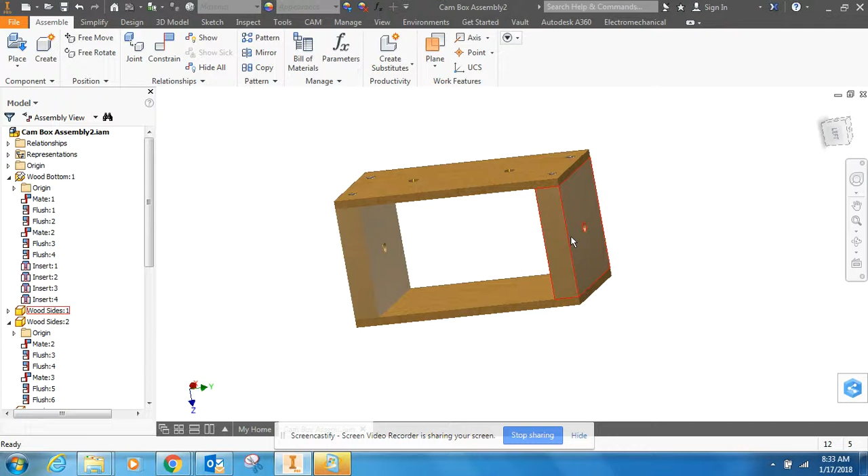This is a video on how to add the cams, the handles, and the followers to our cam box. As you can see, this box is fully assembled. It's got a top and a bottom, the sides, the holes in there, and the screws that we downloaded from Content Center and installed.

Now we're going to put all the other pieces together so we can make it animated and make it move. So let's put the dowel that goes through these two holes in our sides.

So we're going to go to place. We want the one called crank dowel. I'm going to open it up, place it in there, then hit escape. Otherwise, it just keeps adding more of them in there.

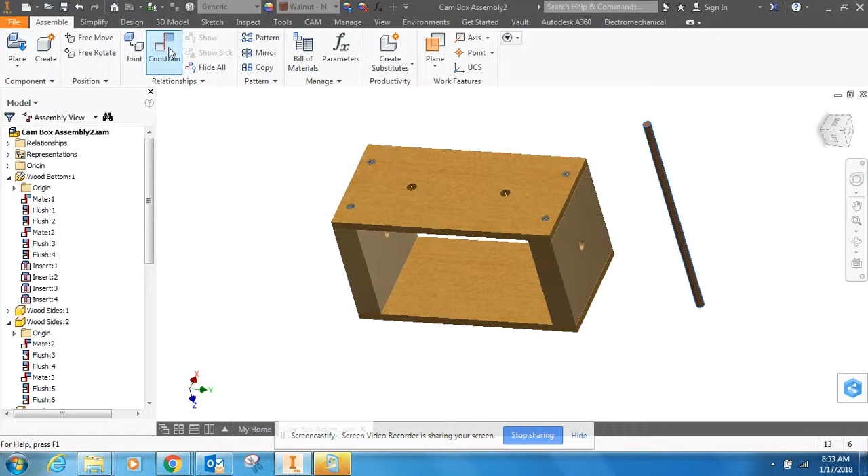Now I have to get this dowel to go in this hole. So I'm going to go to constrain and use my insert constraint. Remember, with the insert constraint, all we're doing is matching up circles. So we'll click on the circle for the hole, the circle for the end of the rod. You see it didn't go in there like I wanted it to.

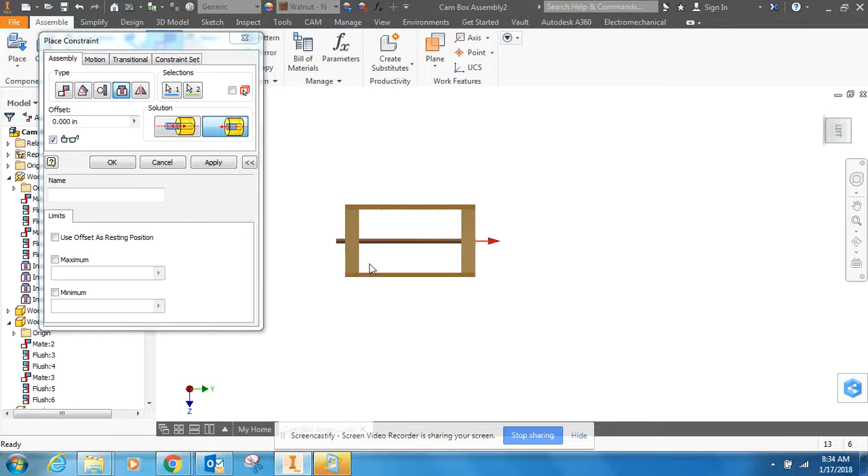That's no big deal. There's a little button here that says align. You can just flip it from one side to the other. Now, if you look at it straight on, you notice how the dowel sticks out on one side and not the other. What I want is the dowel to stick out on both sides.

So I do that with offset. If I type in 0.25, it moved it that way. If it didn't work, then you just change this to negative 0.25. So it's one of those two, either 0.25 or negative. I'm going to apply that constraint.

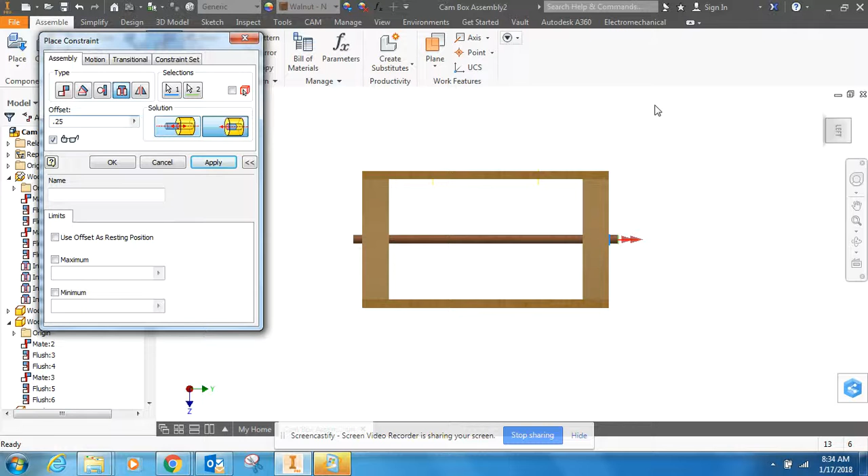Now I want to put the handle on. So I'm going to go to place. There's my handle, crank handle. I'm going to open it up, and again, I just need one of them. So I'm going to put one of them in there, hit escape.

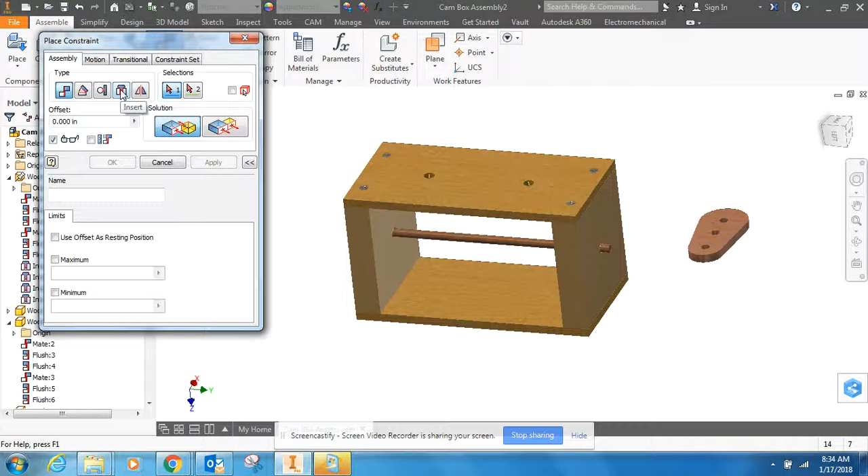Use my constraint, the insert constraint. I'm going to click on this circle and match it up with that circle. I'm going to look at it a little bit closer, and it didn't do what I wanted it to do. So it should be flush on the outside. Again, I'm going to click this align button, and you see where it kind of flushes it out there. I'm going to apply that one.

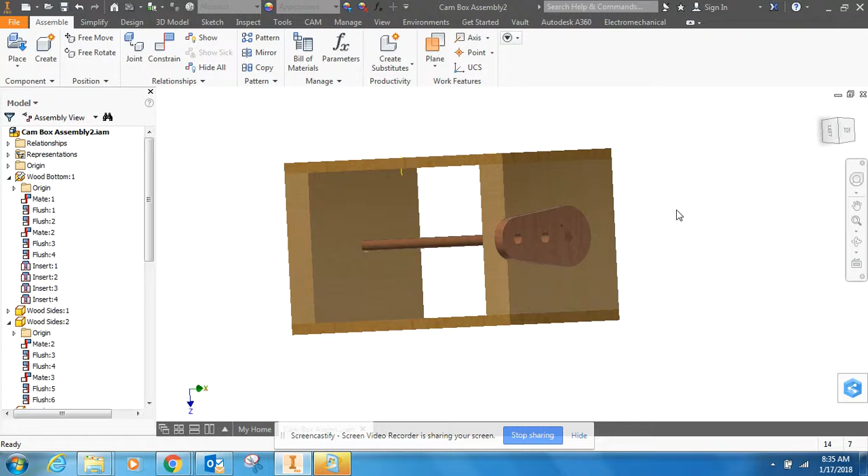Now there's a dowel that goes inside the handle to make it easier to turn. So I'm going to go place. This one says crank handle dowel. I'm going to open it up, place it in my assembly, and hit escape.

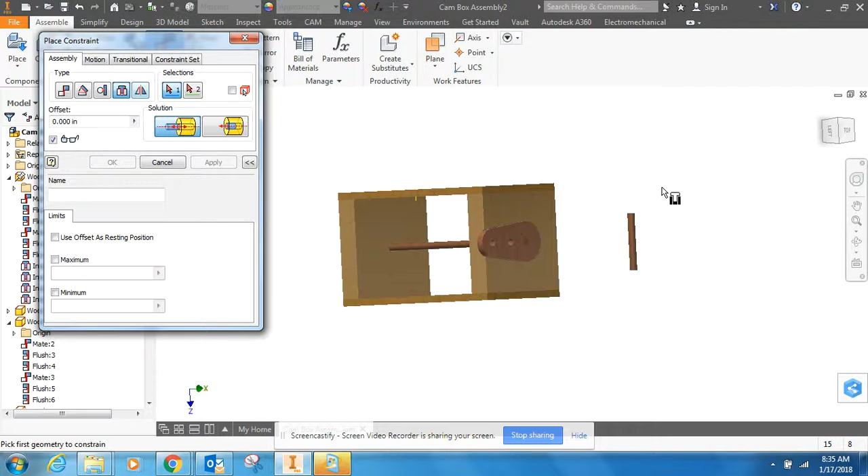I'm going to insert this into that hole. So I'm going to constrain, insert. Again, all I'm doing is matching up circles. So I'm going to match that circle up, not to this outside circle, but to the inside circle, so the bottom of the hole there. So I'll click that one. Again, it went in backwards, so there's no big deal. You just use this tool to flip it, then apply.

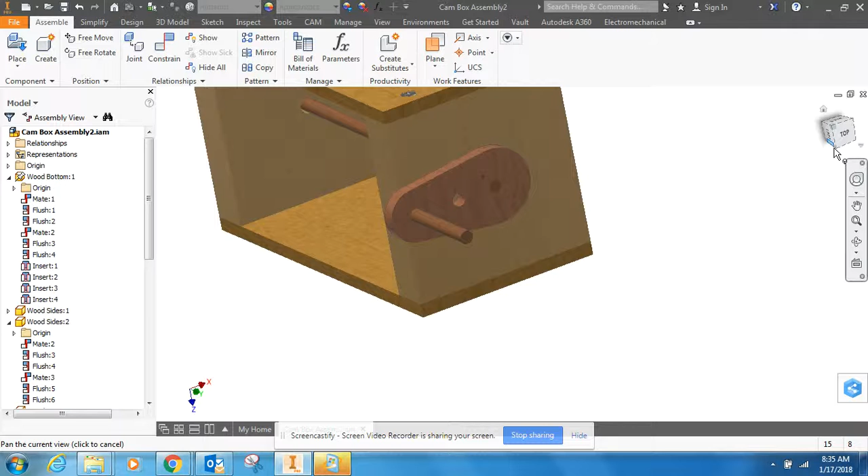There's also a little ring that goes on this side, and that locks everything in place so that when we're actually using the toy, this won't move to the right or the left. It'll stay where it needs to be. So I'm going to place that in.

And it's this follower ring. So I'm going to hit open, click there, hit escape.

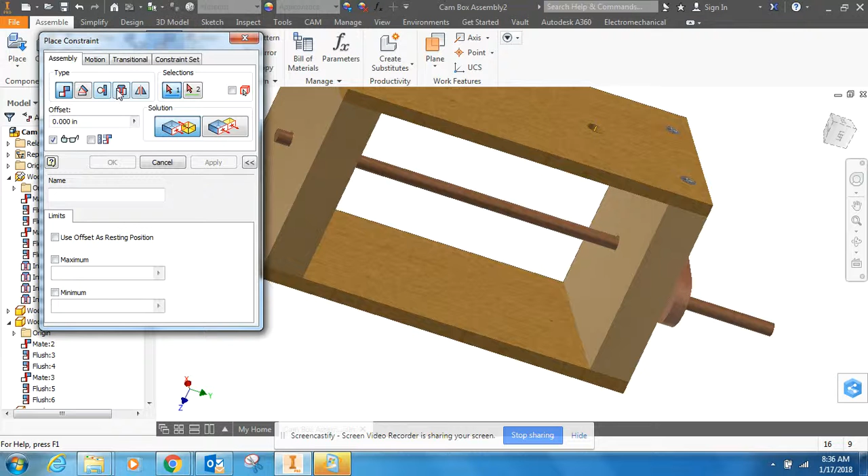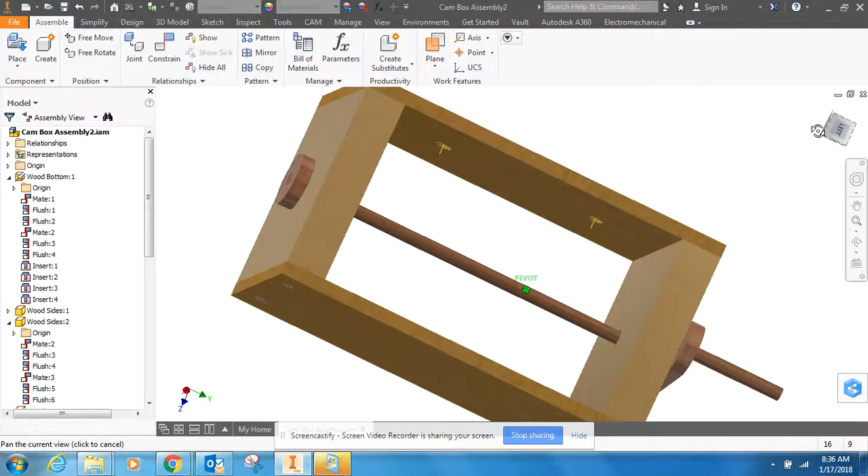Constrain it. Again, I'm going to use the insert constraint. All I'm doing is matching up circles. So I want that circle and that circle to match up. Again, it didn't do quite right, so I'm just going to flip it and apply that one. So that will lock this on so that when we're actually using the toy, it wouldn't fall off or come out. It'll stay in place.

So now if I take my mouse and click and hold on this handle, I can turn it. But if you look really close, the dowel is not turning with the handle. So we have to lock these two together with some angle constraints. To do that, we have to turn on a lot of planes.

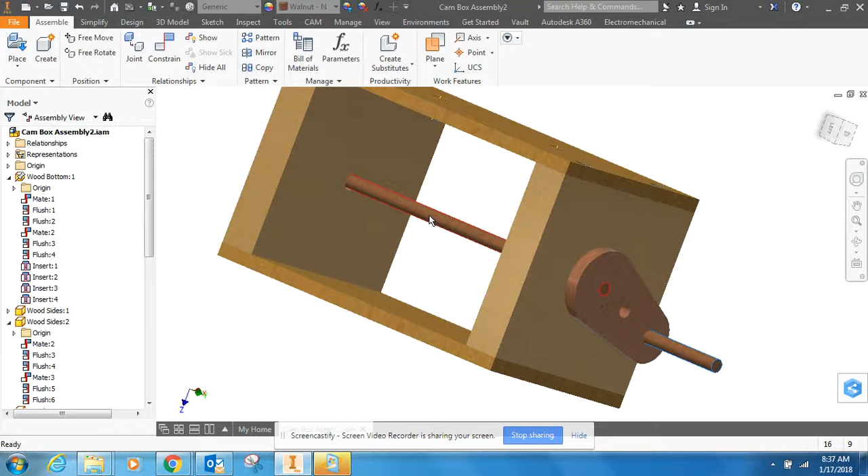So I'm going to double click on this dowel, which opens the dowel up. You notice everything else kind of gets grayed out. That means that I'm working on this part inside of assembly. In my browser bar, it highlights what I'm working on in white. So this is the part that I'm working on there.

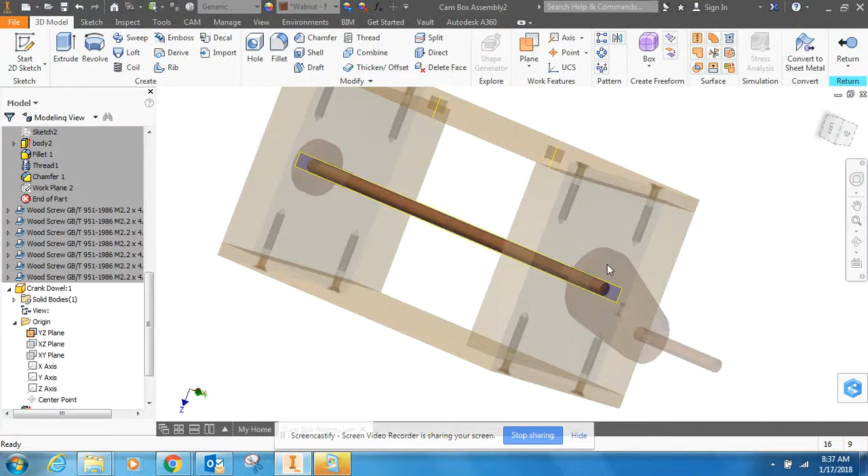What I need to do is open up this origin and look for a plane that I could turn on that would help me. This YZ plane, I'm going to right click on it, click visibility, and it turns this plane on. Then I'm going to return back to assembly. When I return back to assembly, everything goes back to full color, nothing's grayed out anymore.

I need to do the same thing with the handle. So I'm going to double click on the handle, go to my browser bar, go to origin, and look for a plane that I could turn on that's going to help me constrain them together. So that XZ plane looks perfect. I'm going to right click on it and turn on the visibility.

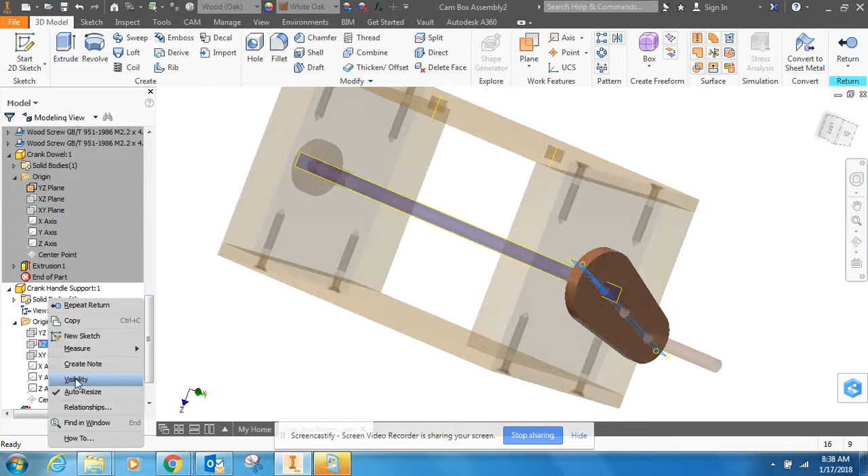Before I leave this, I need a mid plane for these handles and my cams and everything. So I'm going to click on the plane tool, click on the right side of the cam or the handle, and the left side of the handle. That puts a plane dead center.

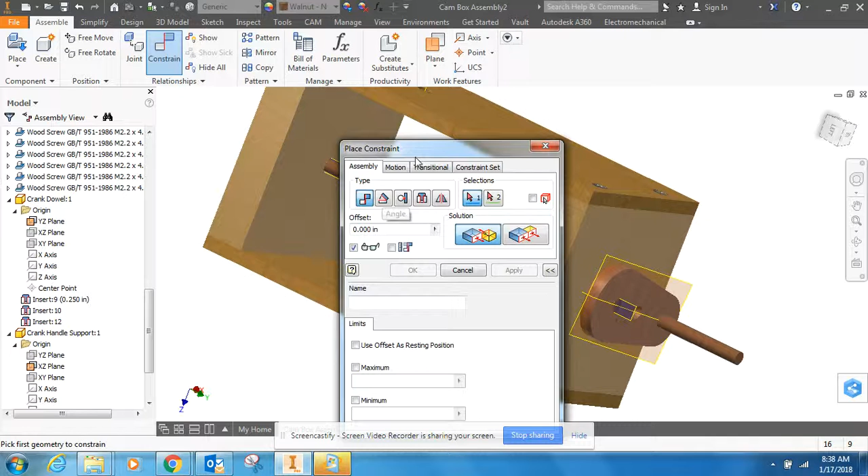Now I'm ready to return back to assembly. What I need to do is lock these two together so they'll turn together, so I'm going to use the constraint tool. This time I'm going to use the angle constraint.

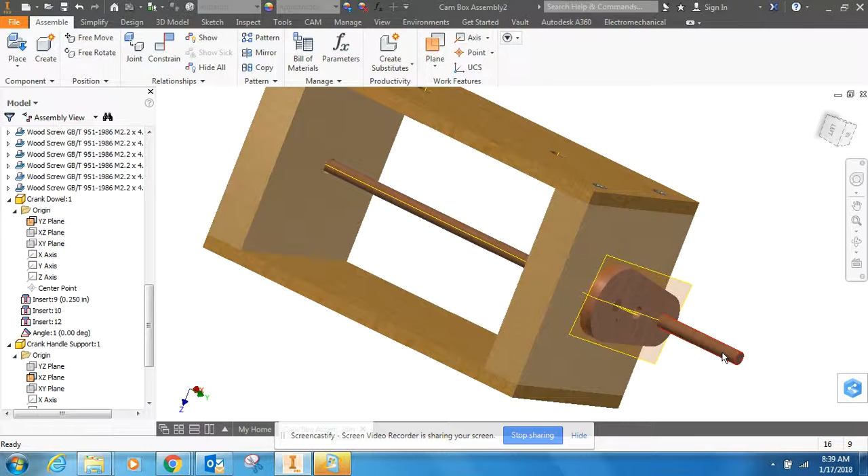You have three choices here. The middle one's the one that always works best for me, so click the middle button. I want to click on this plane that we turned down on the dowel, and the plane we turned down on the handle, and apply that. Close it. Now when I turn the handle, you'll notice that the dowel is turning also.

They're turning together. Now my ring on the other side, it's not turning, so I need to do the same thing for it. So double click on it.

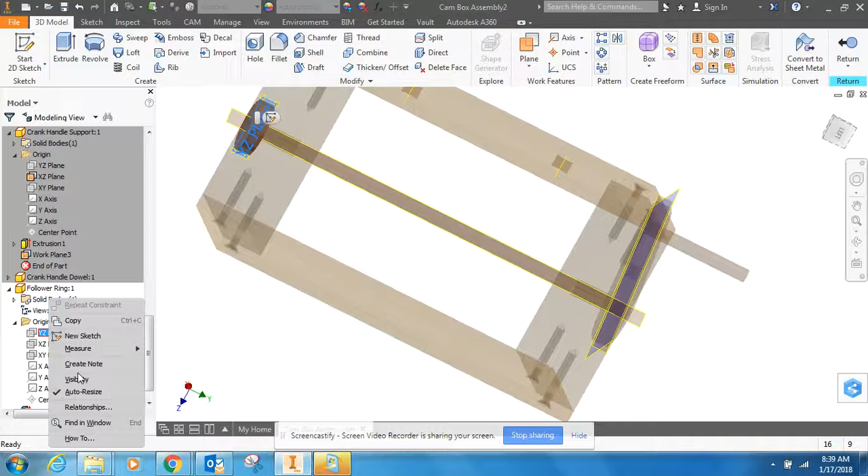Open up Origin. Turn on the YZ plane. Return back. Now I'm going to constraint using the angle constraint.

Click on this middle button, and I'm going to constrain this plane to the plane of the dowel. I'm going to apply that. Now when I turn the handle, you can see they both turn together. That's what we want.

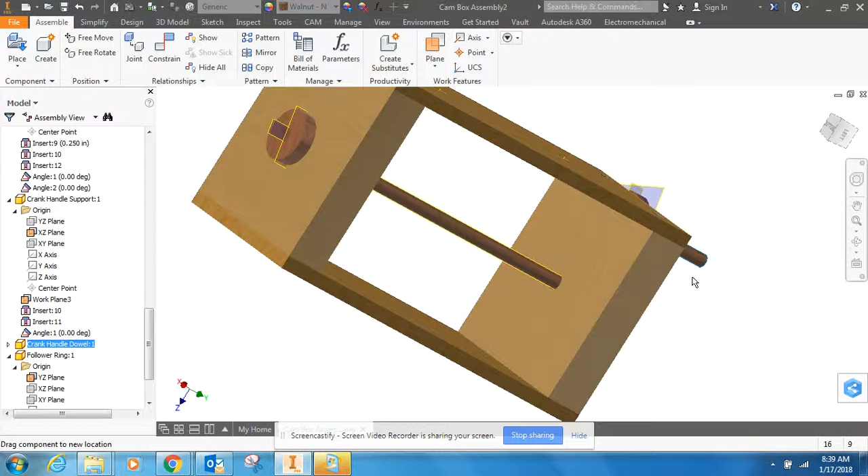So now we're ready to put in our cams. Again, I'm going to place these, all my parts. I've got several options here: an egg-shaped cam, a hex cam, an offset circle cam, a snail cam. Let's put in the egg-shaped cam to start with.

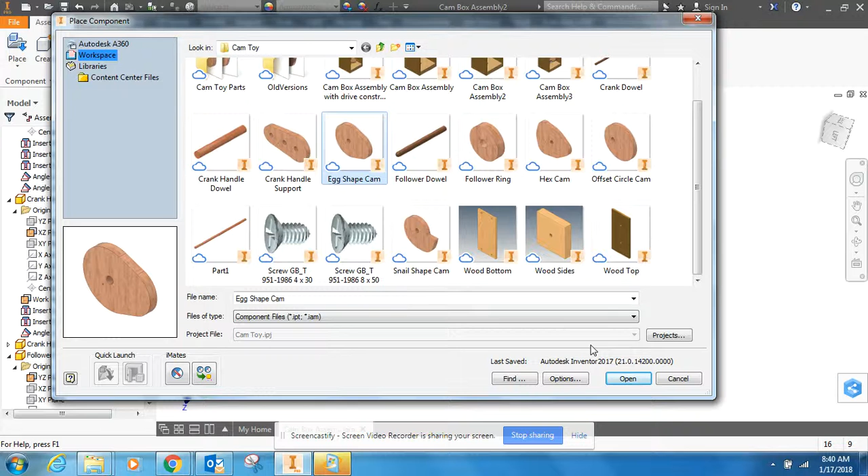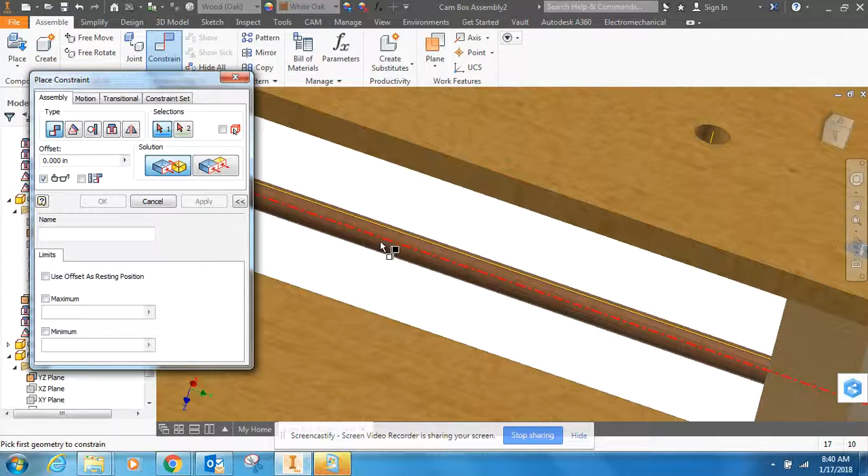I'm going to hit escape. I need to constrain this cam to this dowel, so I'm going to constrain, and instead of using insert, I'm just going to use the mate constraint. I'm going to zoom in really close on the dowel and find this red line. That's the center axis. I'm going to click on it.

Then I'm going to do the same thing for the cam. I'm going to zoom in really, really close and find the center axis for this hole, and click on it. Then I'm going to apply it. What it does is line up those two center axes.

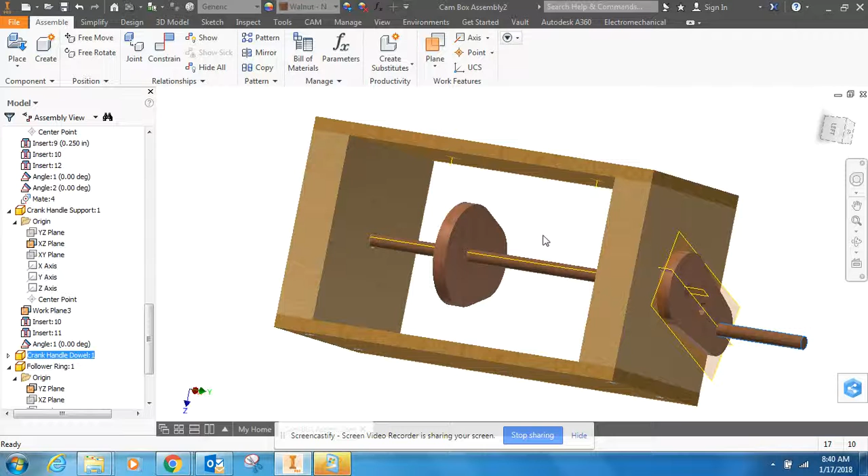But if you notice, when I turn the handle, that cam is not moving. It's not turning at all. So I have to do the same thing for this cam that I did for the handle.

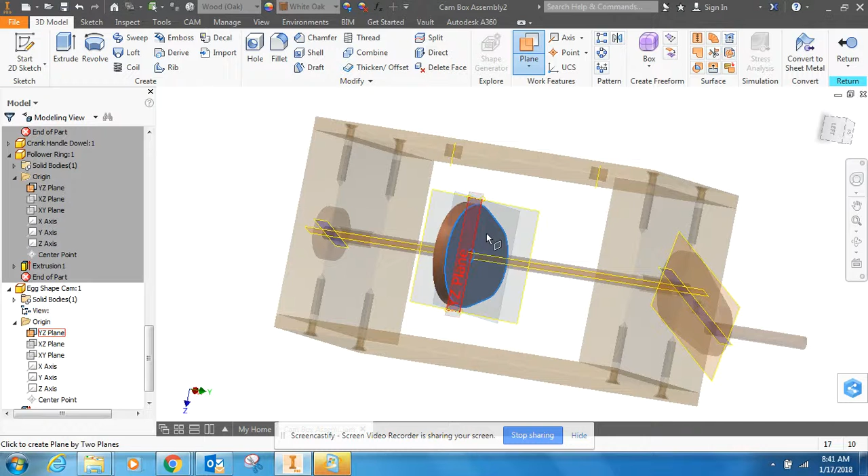So I'm going to double click on the cam, open up the Origin, and turn on the YZ plane. Also while I'm here, I need to turn on the mid plane, so I'm going to click on the plane tool, click on the right side of the cam, then the left side of the cam. Now I'm ready to return back to assembly.

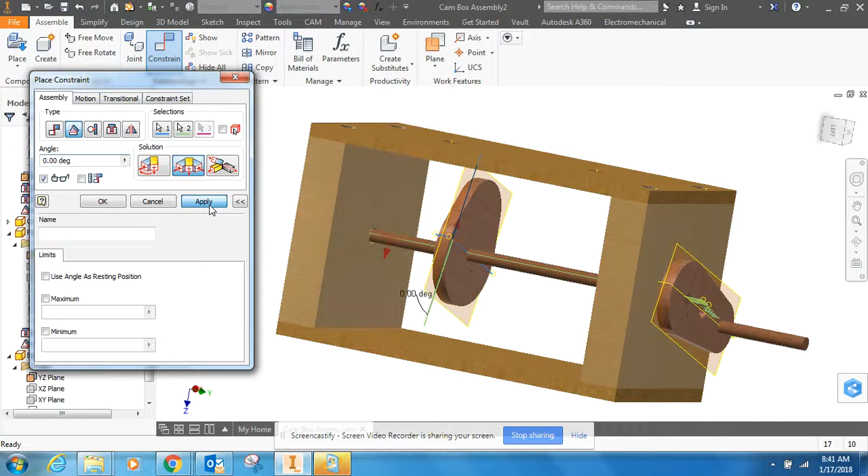I'm going to go to constraint, then my angle constraint, then click on the middle one. I want to lock this YZ plane to the plane of the dowel, and apply that. Now I'm ready to close it. Now when I turn the handle, they turn together. That's what we're after.

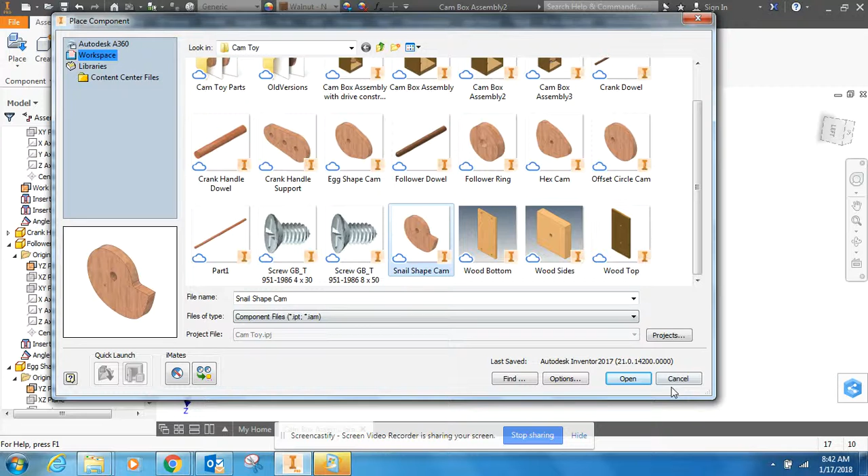So let's place in another cam. We've got lots of options here. Let's try the snail cam. I'm going to open it up, place it in again, hit escape. I only want to put in one.

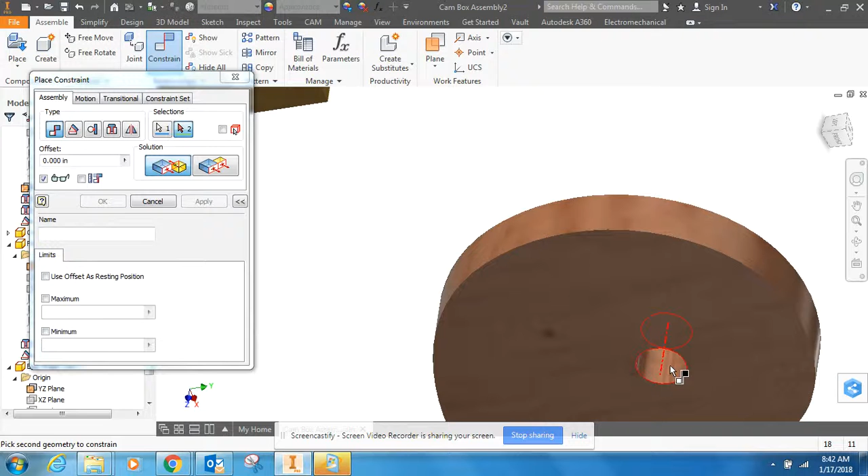I need to constrain it to the dowel just like I did before, so I'm just going to use the mate constraint. I'm going to zoom in really close and hover till I find this red center line, then do the same thing here, hovering in really close to find the red center line there. And I'm going to apply it.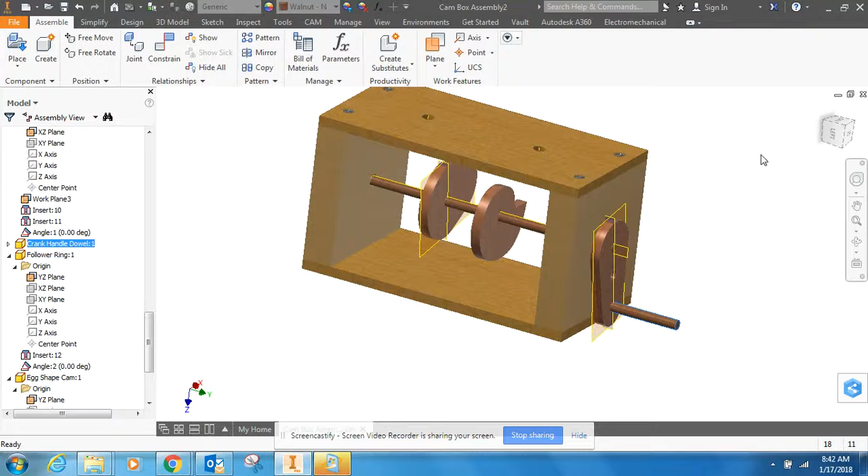I'm going to close this. And again, when I turn the handle, only the one cam operates. The other one doesn't turn. So I double click on the snail cam. Again, it's highlighted in white.

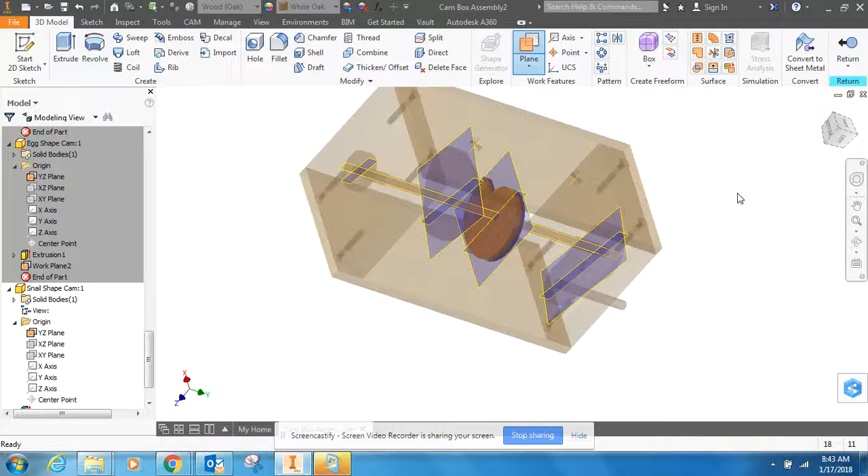Open up the Origin, and I'm going to turn on the YZ plane. Then also while I'm here, I'm going to make a mid plane, so I'm going to click plane, then click on the right side of the snail cam and the left side of the snail cam. Again, it made a plane dead center, so I'm going to hit return.

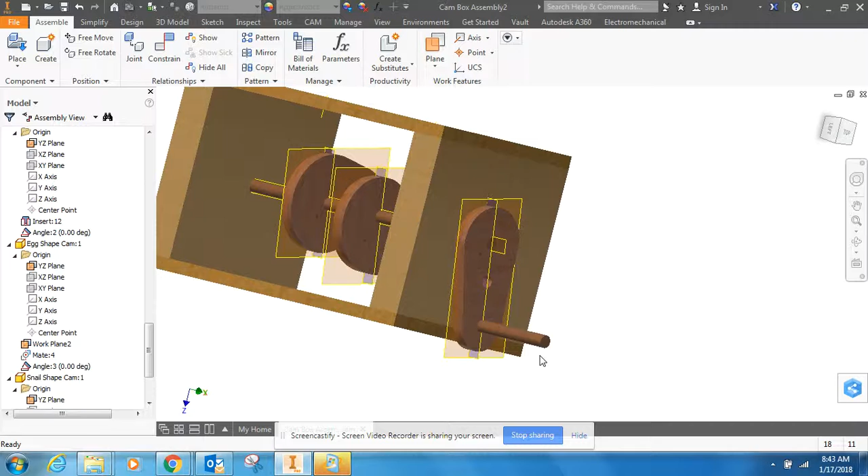Now I'll go to constraint and do my angle constraint. Again, click on the middle one, and I'm going to lock this YZ plane to that plane and hit apply. Now when I turn the handle, those cams should turn with it.

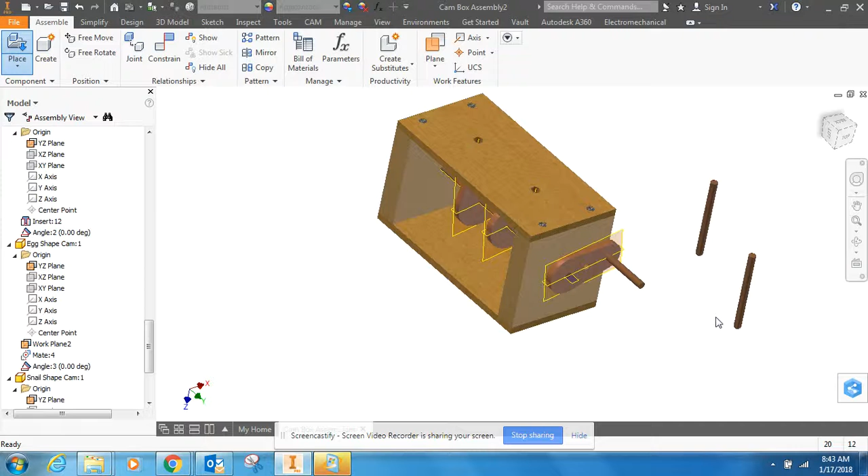Now we're ready to add the followers. I'm going to go to Place. Here's all my parts. I'm looking for my follower dowel. I'll open it up and place those in my assembly. Then I'll hit escape. I want the rounded end pointed down.

If yours isn't, you can click it, do a free rotate, and spin it around to where the rounded side is pointing down.

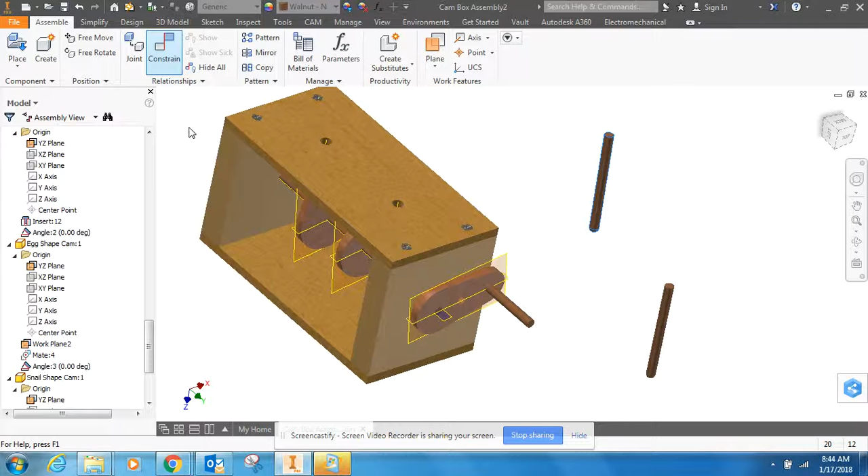What I'm going to do is constrain these to these holes. I'll do the same thing I did before. I'm going to use the mate constraint instead of insert. So I'll find the center line here, zoom in really close, and hover this hole until we find the center line.

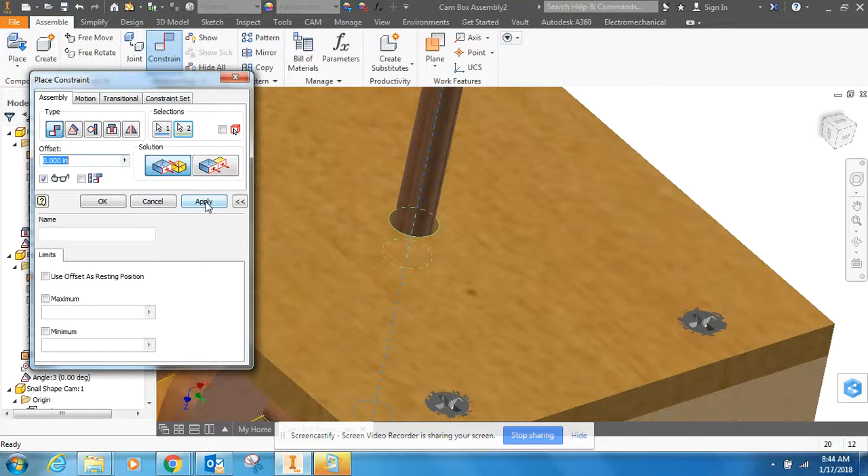Apply that one. We'll do the same for this follower, finding the center line, and I'll apply that. If I would have used insert, it would lock these in place and they wouldn't be able to go up and down. But using the mate, they can go up and down.

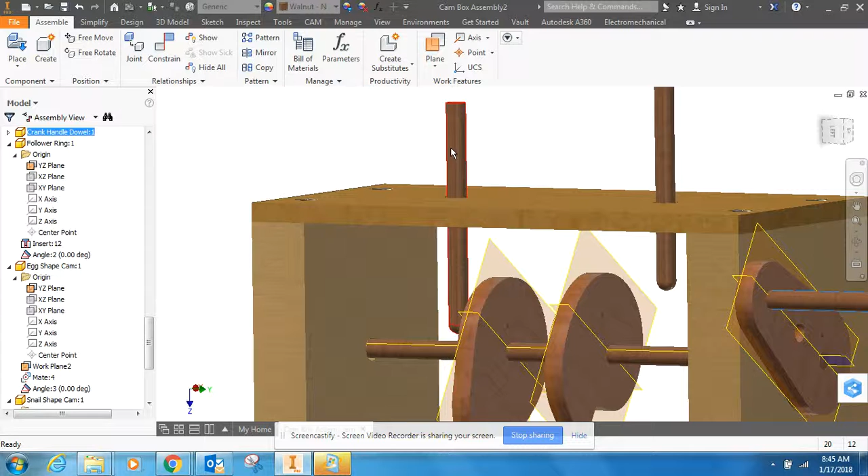Now if I turn the handle, the cam moves, but not the followers. So we've got to work on that. First thing I'm going to do is line this stuff up, making this follower perfectly in line with this cam.

To do that, I'm going to use a constraint, the mate constraint. I want to find this center line, just like we've been doing for the follower, and then click on this plane, this mid plane that we turned on earlier. I'm going to apply that.

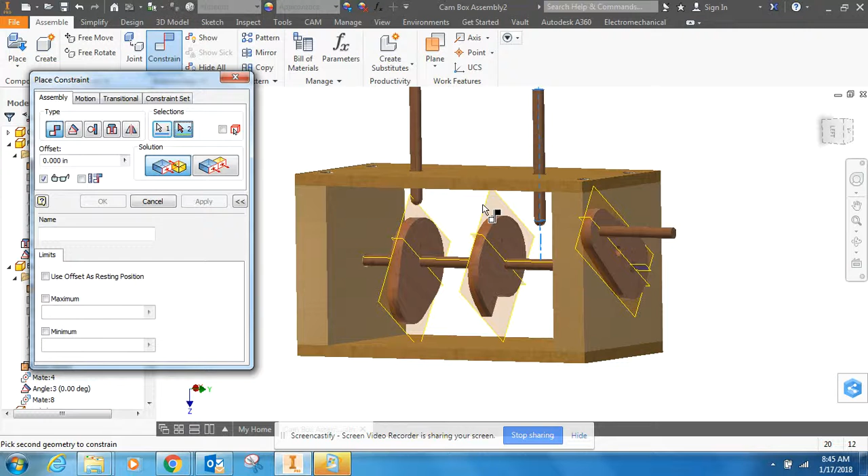I'm going to do the same for this one, clicking on the center line for this follower and then the mid plane for this cam, and apply that. Now if I turn the handle, you'll notice the followers still aren't moving, but if you look at it straight on, everything is perfectly in line. So that's one step.

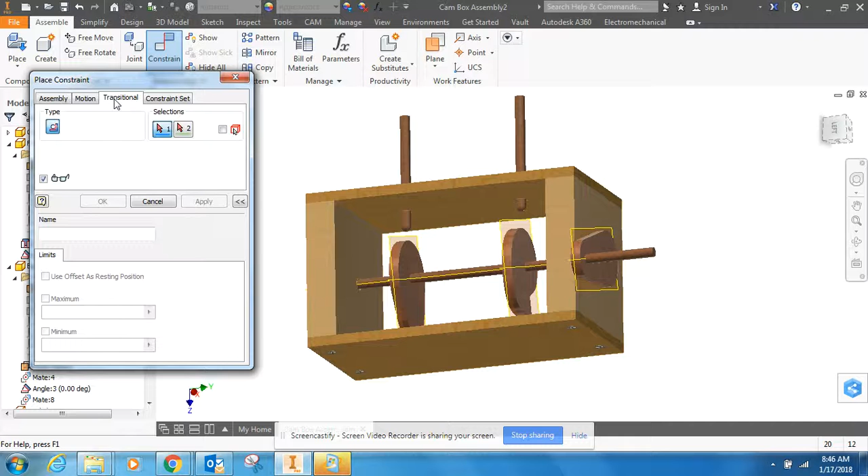To constrain these together so they move together, that's another kind of constraint, a transitional constraint. I always want to click on the follower first. You'll notice how these are filleted at the bottom—it seems to work better if these are rounded at the bottom. So I click on the follower first, then the face of the cam, and apply that. Close this down, then turn the handle.

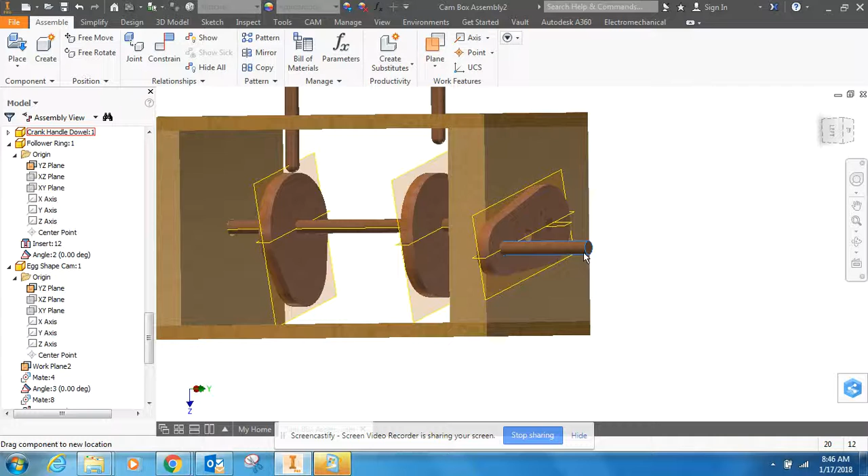You can see how the follower is following the cam. Now I'll do the same thing with the snail cam. The snail cam is tricky. One thing you need to do is make sure this is filleted. That seems to help, but a lot of times the snail cam follower will crash.

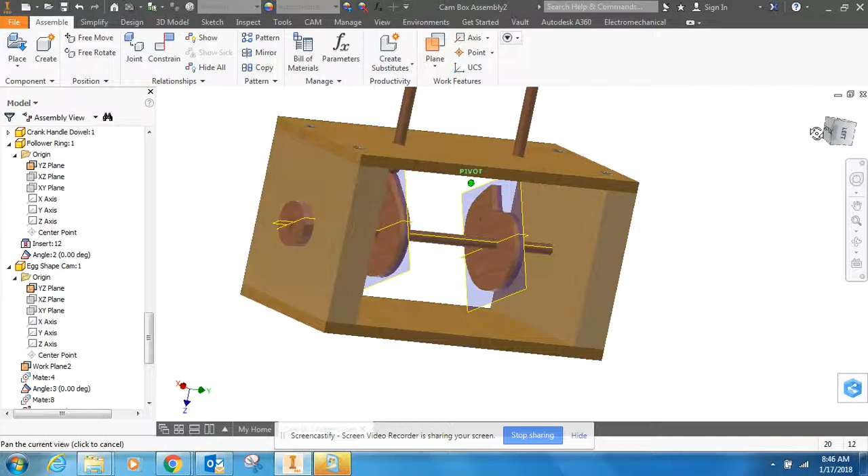It will just fall to the center, and I just keep redoing it till it works most of the time. So I'm going to constrain it—again, it's transitional, always click on the follower first, then click on the face of the cam. I'll come in here and click on the face of the cam, apply that one, and close it.

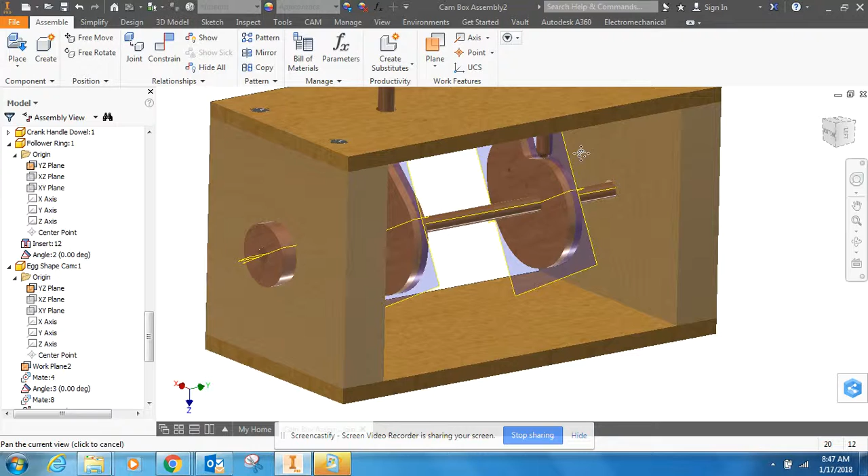Now I'm going to turn it around and turn this handle, and hopefully the followers will follow the cam. And they're working. So that's great.

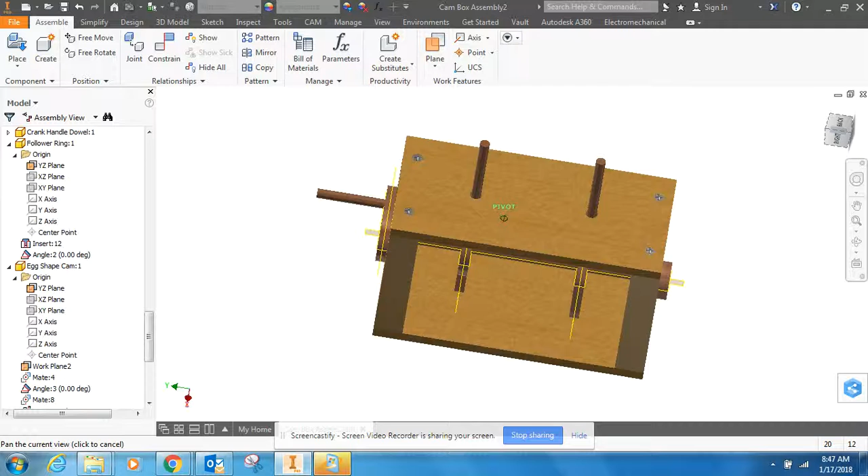One more thing we can do is animate this so it can drive itself and we can just watch it. What we need for that is to make a plane that we can drive, that we can make rotate. To do that, I need to make two planes work together. So I'm going to double click on this wood block, part of our box.

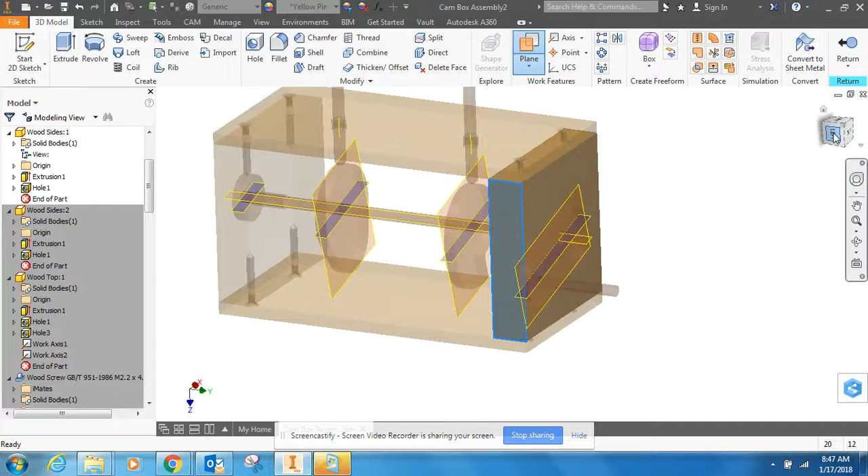I'm going to click on the plane tool. I'll click on the left side of the box and the right side of the box, making a center plane. Return.

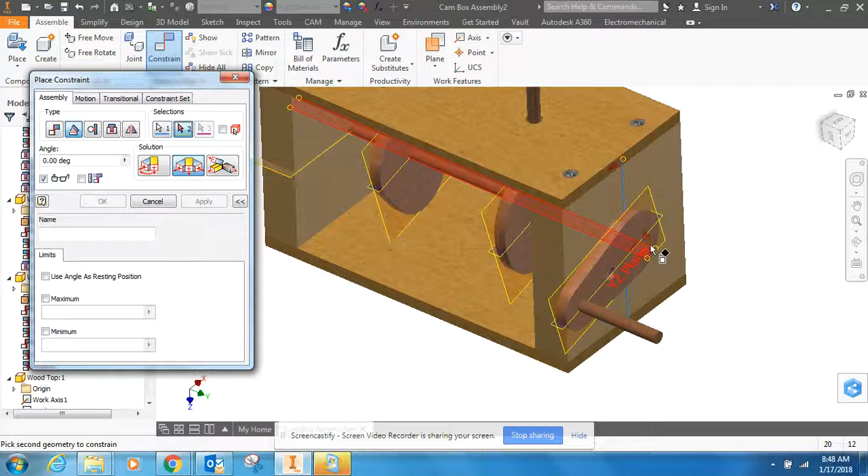Now I'm going to make another constraint. I'll constrain using an angle constraint, again using this middle one. What I'm going to do is constrain the plane we just turned on to this plane of the handle or the dowel. I'll use the dowel one and apply that.

Now if I click on my dowel, it will highlight in my assembly—there's my dowel. This last constraint, I'm going to rename it. I'll say this is my drive constraint.

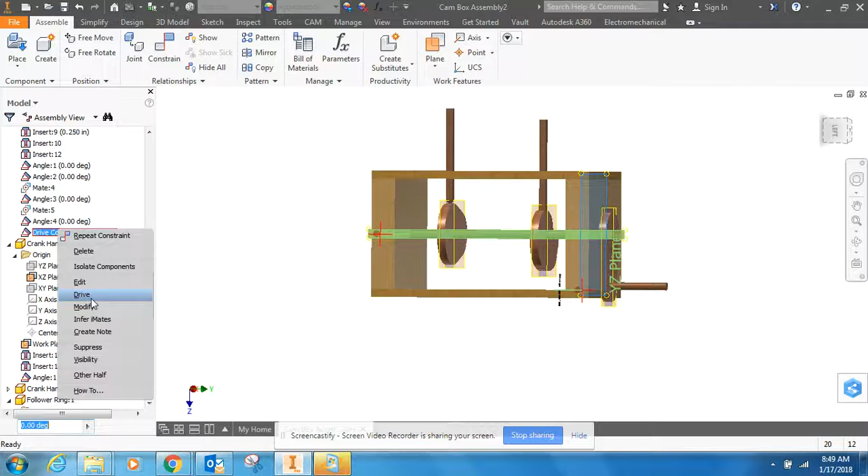I'm going to right click my mouse and click on the word drive. A box comes up that lets me change the degrees—how much do I want it to move? So I'm going to put 720 degrees.

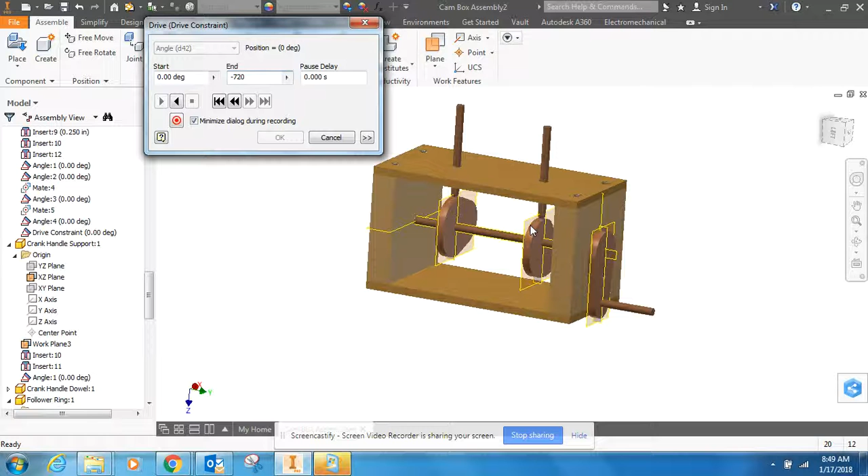Then I'm going to take this and move it so you can see it. I'll hit play. Then what I want to do here is make it negative 720, because my cams are going backwards and my snail cam is going to crash. And now you can watch it animate.